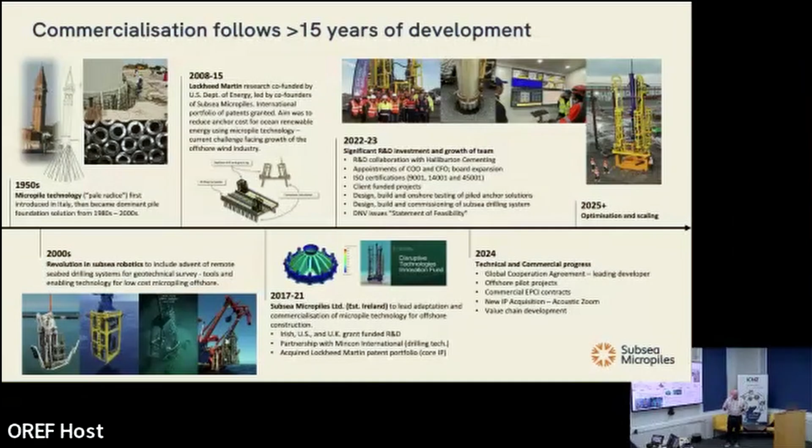Just to give everybody a little bit of context around the background, micropiles started off in the 50s in Italy. Fernando Lizzi, an Italian engineer, was tasked with trying to save old monuments in post-war Italy where there was no money and very tight space in built-up areas. So the traditional ways of stabilizing the soil beneath these monuments just weren't an option. And he looked at the root structures of trees for inspiration, and eventually did this, where he replicated it. And as it grew over the next 20, 30 years, it became the dominant foundation onshore. And what Subsea Micropiles are doing is adapting that same very proven technology and applying it to offshore subsea.

It started in 2008. Our CEO and founder, Derek Robertson, was working with Lockheed Martin. They were putting a huge amount of money into renewables at the time. They wanted to build these energy conversion units that were like big oil rigs. And they were in deep water offshore Hawaii, where there's volcanic seabed. So deep water, very hard seabed, really difficult to anchor anything in.

And John Machin, who is a renowned geotechnical engineer that I worked with at Acteon, got together with Derek and said, well, why don't we use a cluster of micropiles, the same as they do onshore in civil construction, and just install them instead? And of course, the first question is, how on earth are we going to do that at 2,000 meters water depth? But at the same time, there was this whole revolution happening in subsea robotics, where the tools needed to do it were actually already coming to the market. They were being used for geotechnical drilling and soil sampling.

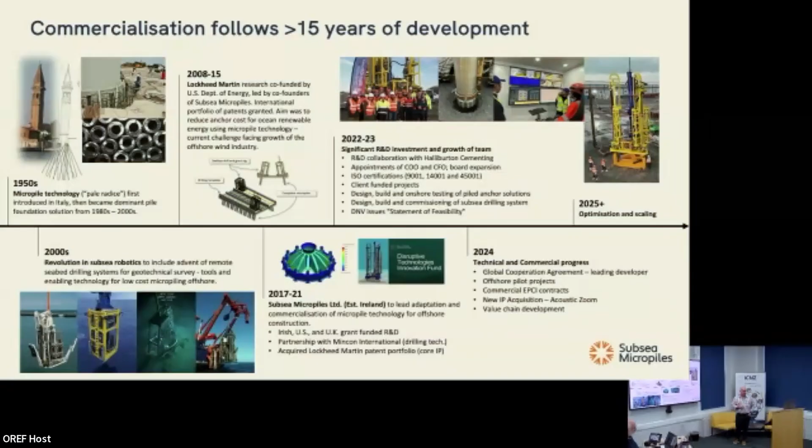Oh, you've got something exciting to do. We can definitely help you. And so we decided to do our prototype test here. Then Orkney Harbour actually got on board very quickly and said they need an anchor. So we combined the two, and it helps us get to technology readiness level 8 if we install a commercial anchor. So we agreed commercial terms with Orkney Harbour. So when we installed it, we sold it to them, which helps us, helps them. And now they've got a working anchor in Scapa Flow that they can use.

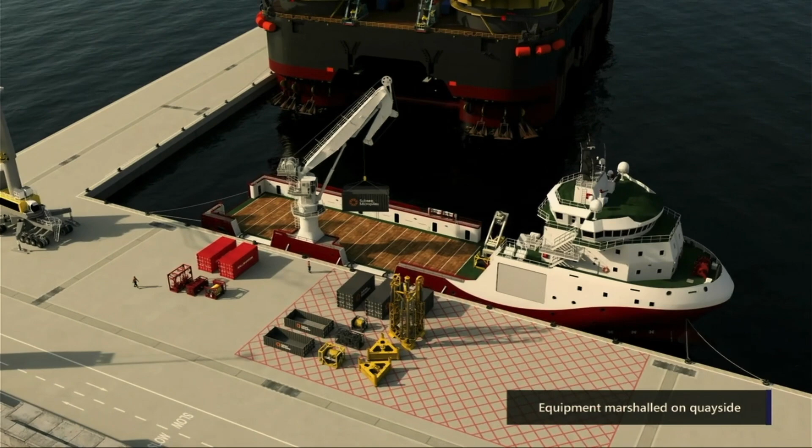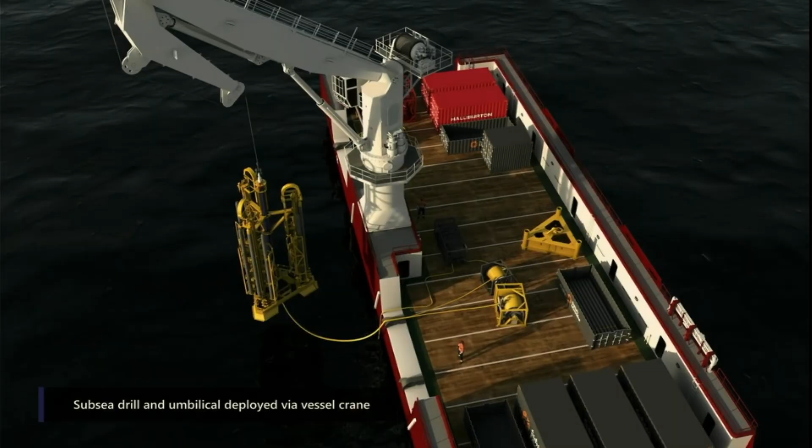And now we've finished the project. We are now looking at optimizing designs and starting to scale up a bit and look at the next things down the road. I've got an animation next that just gives you a cartoon of how it works, how it all goes together. This was the anchor that we installed in Scapa. About 8.5 tons, triangular steel anchor with a pile sleeve on each corner. So we put it on the seabed and then lower our drill down on top of it, which is the same shape.

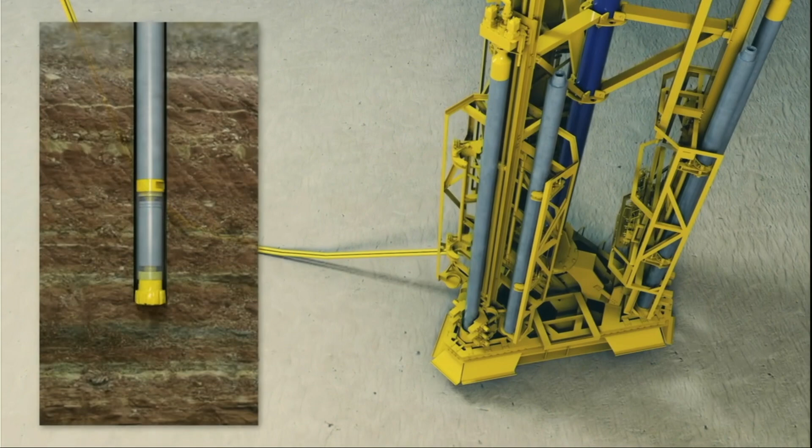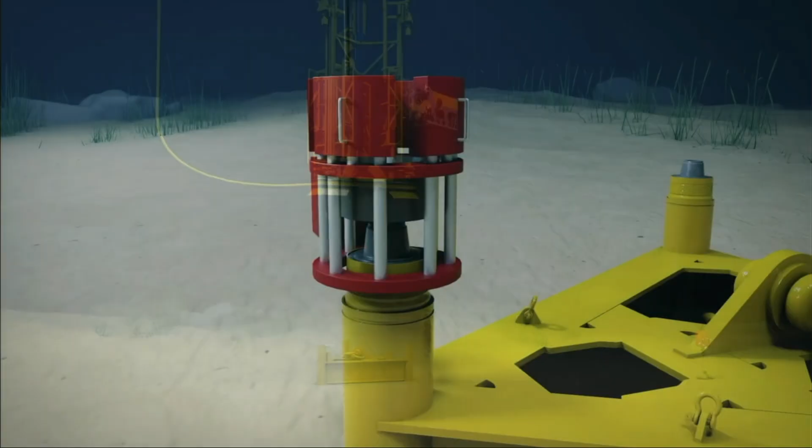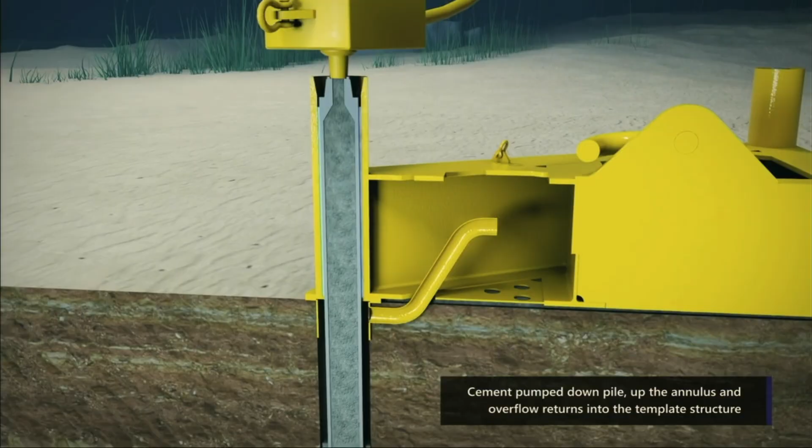We use a percussive hammer drill because we want to take advantage of really quick drilling penetration through rock. And what that means is we pump high pressure seawater down the middle of the pile, which fires the percussive hammer, which allows us to drill and make good progress. Then we flush the annulus with the same seawater. We make the connections on the seabed with the clamp system on the drill. So we work in 6-meter pile lengths. In Scapa, we installed 18 meters, so three 6-meter piles in each corner. And the intended end use is the floating wind farm, or the floating wind foundations.

So it's interesting the journey that we've been on, because the percussive hammers have never been used subsea. They're very well used onshore. Every mine around the world uses percussive hammers to make progress through rock. We have a very good partner in Ireland called Mincon, who is a drilling technology company, and they've supported us all the way through this. And they've designed and built percussive hammers to work with water rather than air, which they use onshore because air is readily available, and these mines tend to be in isolated areas where water's rare.

So we went through a whole build and test campaign for about 2 years with the hammer, with two objectives. One was get it to do what we want it to do, but every iteration of design was to get cost out as well, because these are consumable items for us. So it sounds a bit crazy that we'll drill a hole with an expensive drill and we'll leave it all in the hole and grout it and cement it in.

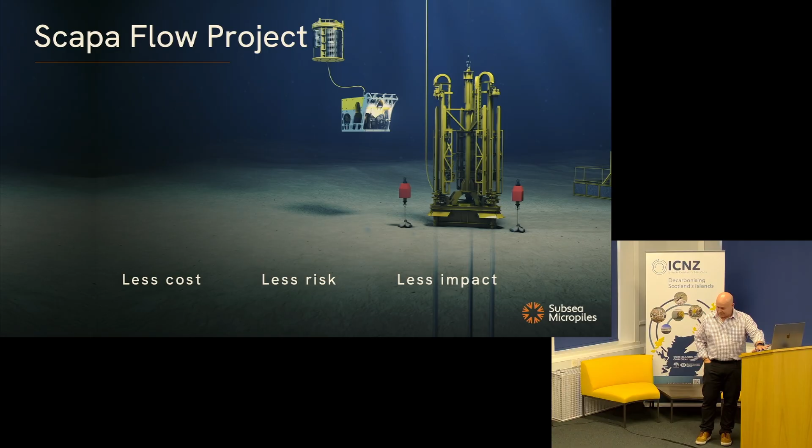No, that's fine. Carry on, sorry. Okay, no worries. No, I mean, everybody's welcome. I'll just let this play. I think I have to press it twice.

This is a video. You might have seen it on LinkedIn, but we made this at the end of the project. Taken our whole drill system to Orkney and mobilised it in the yard.

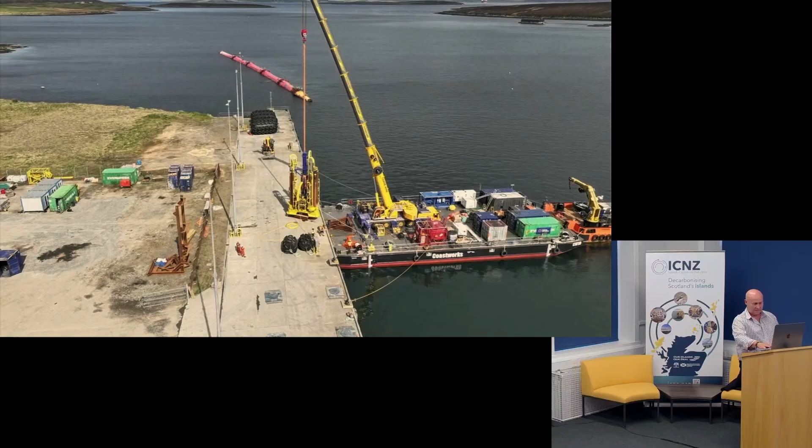Can everybody hear that? It's just playing through your laptop. You can see behind us now. It's ready to go subsea and to drill in the piles. I don't have a clue how to do that. That's the only bit of talking anyway.

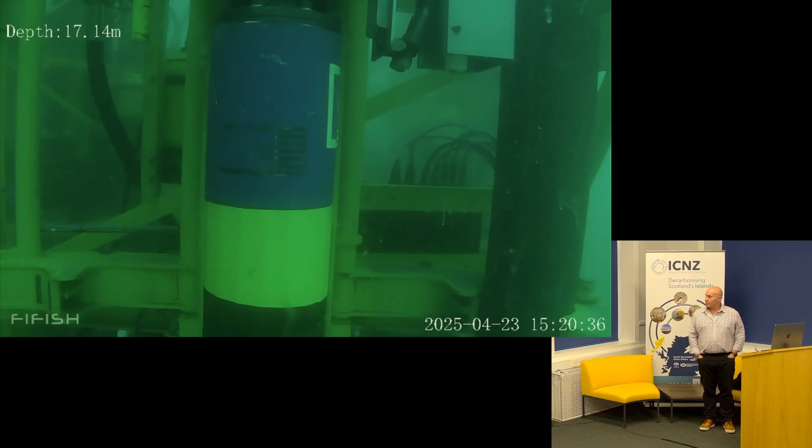We tried to get lots of the landscape in as well. So I think with all the work that went into planning this, a lot of time with Alex and Leask Marine and Gareth, we were actually only drilling for one afternoon. So we installed all 3 piles for the first time ever, subsea, in one session in the afternoon. They took much longer than when we were doing them on shore, when everybody could see everything and touch it.

So we were very careful, very slow, deliberate steps. Figured nobody was going to thank us for dropping a pile on the seabed. So I think it took us something like 2 3/4 hours in the first one, about an hour and 45 minutes in the second one, and quicker in the third one as everybody got more confident, more comfortable with it all.

There were a few very basic objectives for the project. We wanted to demonstrate as a company to the industry that we were capable of a full execution in an offshore environment, subsea, which was a big step for our company. Like I said, we started 3.5 years ago, I was number 2 employee. We did this project in April, and I think we've grown by 5 more since then, so we're up to about 22 people now. We wanted to reach TRL 8 with a commercially installed anchor.

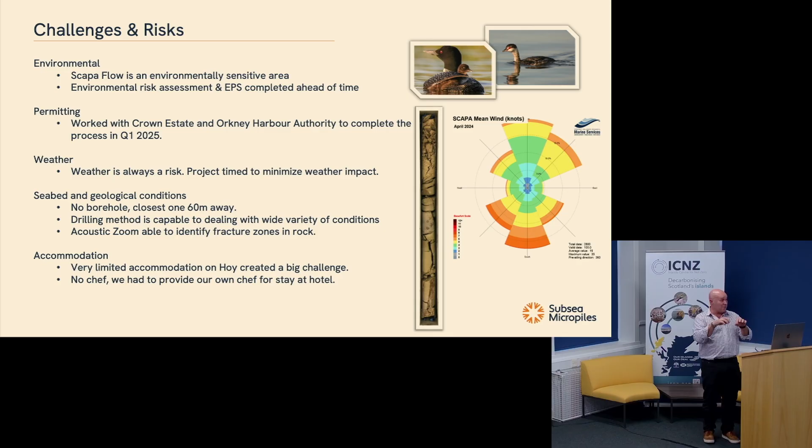So we got there, and then it turned out there was no chef, so we had to provide a chef as well. Luckily, my brother is a chef offshore, so he had a network of chefs that we were sending up on time off for a few months. So the guys actually got very well spoiled in the end, but they were this close to living off Co-op meal deals. So as always, any project has various risks and challenges, and you work through them, and we had a lot of help along the way.

What we did with the survey really astonished us. So we installed something called hydrophone streamers on the seabed. We did that about a week before. Leask had a vessel available, so we went and put them all down the week before and put the anchor template down at the same time. We put them in a pattern of 2 chevrons with a circle around the anchor.

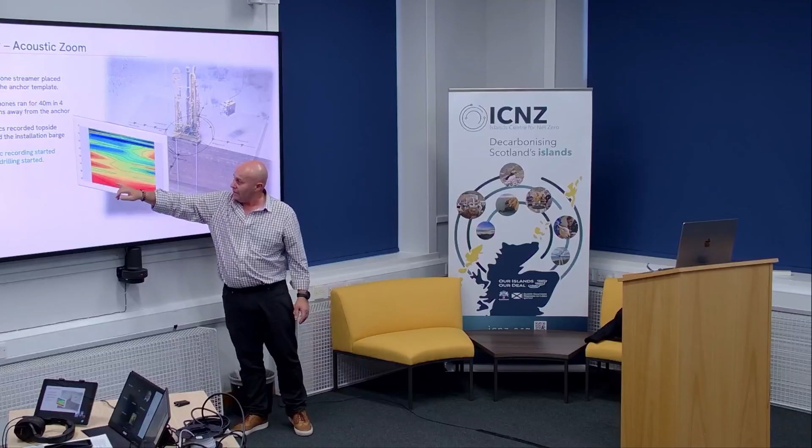And we had a hardwired laptop on the barge when we were drilling during all the operations to record and log all the data that was recorded. This might look a bit like a tie-dye T-shirt to everybody, like it did to me. But what we're seeing here in these red areas is fractures in the rock, about 13 metres down from the seabed.

And the most amazing part was our chief scientific officer in the company, Jacques Guigné. He lives in Canada. And I was standing on the cliffs because there was no room on the barge for me, talking to the project manager, James, who you saw in the video. And Jacques called me from Canada and said, "Are you drilling yet, Mark?" I'm like, "No, they've just test fired each of the hammers."

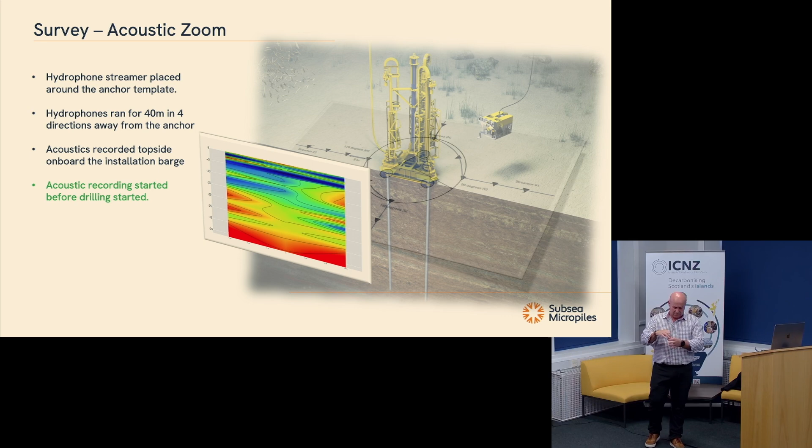So at this point, the hammer is touching the sand, but it's not penetrating. It's just enough to resist so that we can put some water pressure through and test fire it. And Jacques said from the test firing, this is what he could see. So he could see fractures in the seabed 13 meters down before we'd even started drilling. And he's like, I'm looking at the raw data coming in and there's fractures.

And I said, okay, great. You know, we'll drill through them. And he said, how much grout have you got? And I thought, oh, that's a point. So it gave me some time to think about it. It didn't cause us any problems drilling. So we went ahead, drilled all the holes that afternoon and started thinking about how we're going to grout, because it's obvious if there's cavities and fractures in the rock, we have a high risk of losing grout into the formation.

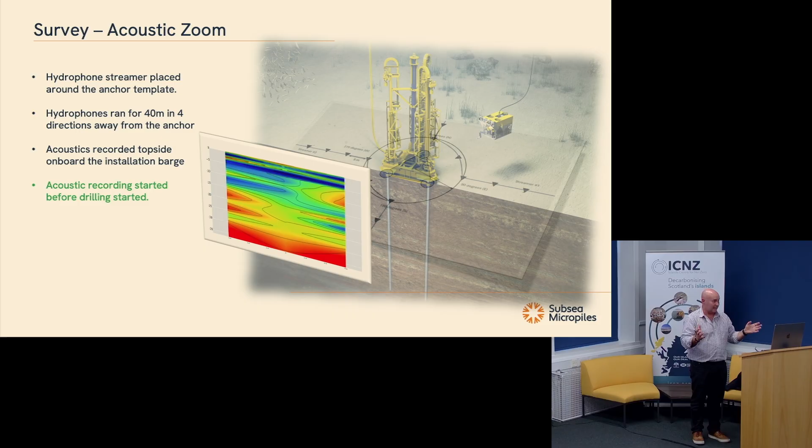So we had a thought about doing that and decided we'll probably have to do it in 2 sessions rather than one single session, because if we start losing grout, we only had 10 tons of grout. We planned to use 6, and I think we pumped 5 down and we weren't filling anything up, and we thought, right, let's stop there, let it set and cure, and then we'll top up, which is what we did. We grouted the first lot the next morning after we drilled, and then we stopped after about 2 hours, and then we came back a week later and finished it off, topped it off.

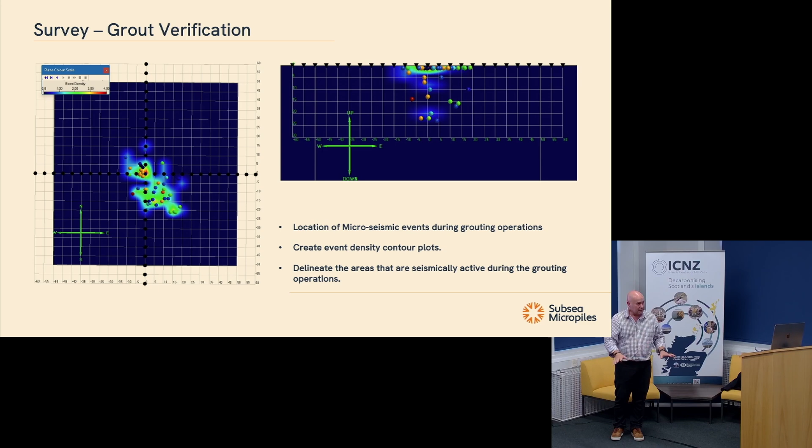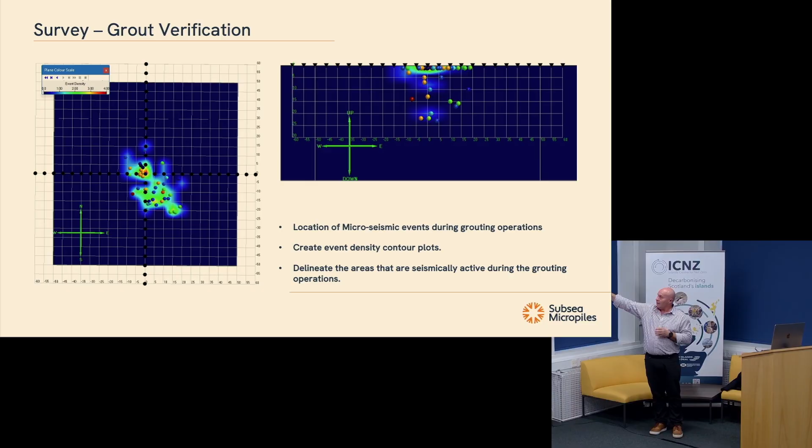The other thing that was amazing about this technology was when we were grouting, we're pumping a heavy but very, very viscous liquid down the hose, not at high pressure, but the noise of it travelling through the hose and down the pile and into the seabed, into the rock structures, was enough for our hydrophones to pick up microseismic events in the seabed, which allowed us to track where the grout went. And so all these points are where the microseismic events happened. So we now know that when we were losing grout, where it was going. And it led us to develop a 3D cloud image of exactly where the grout was.

And so we were really happy with this. This is a huge step forward in a much quicker time than we had thought was possible. It shows us here that we're losing grout into some sort of cavity down here. You would expect to see a lot in the shallow part, but it verified for us where it went. And this has quite big implications in the industry, because generally people don't know.

You know, you pump grout down and you wait for it to return, and you now know that you've got a full circular return, and you pre-agree how much you're going to return. DNV have some stipulations about that, how much overage. You calculate how much you've pumped, and that's it. You don't know if you've lost any. You don't know if it's gone into any fractures normally. So this is really a really big deal for us, and we're continuing to finely tune. I say we. Jacques Guigné is the guy behind this. He's continually fine-tuning this.

Is it in feet rather than metres? I have no idea. Well, you said you were only putting 18 metre piles in, and it's over 25 down is the bottom of the grout picture. Well, that's right, because we were losing it into the fractures, and we didn't know whether those went up, sideways, or down. Well, that's what I was trying to work out. Has it gone down below? So it looks like it's gone down here.

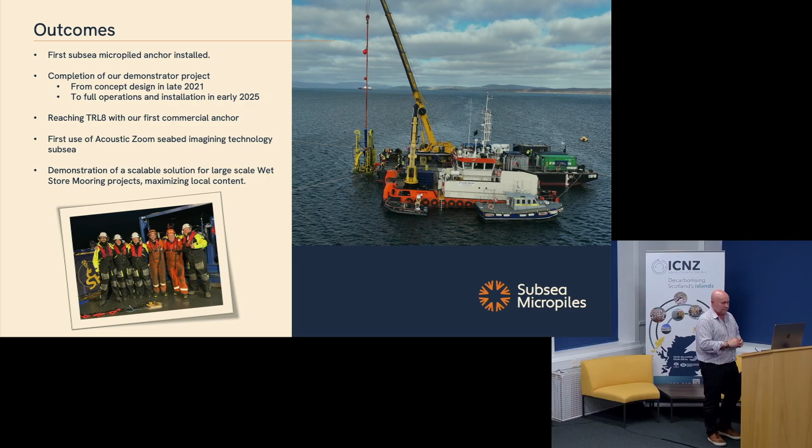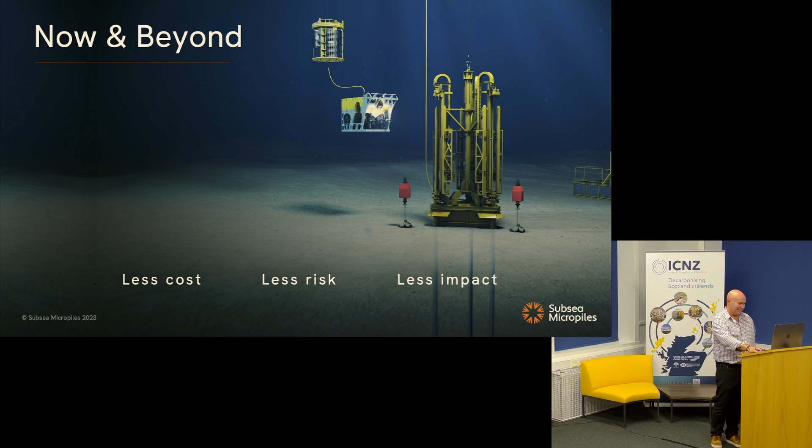So next for us, everything gets bigger. We've got some pretty significant industry partners supporting us. Mincon, you saw their hammer drill in the water, their percussive hammer. They are a global publicly traded company based in Shannon in Ireland. Fantastic to work with. And they've supported us all the way through and will continue to do so.

Halliburton has worked with us for 4 years very closely, and they're our grouting partner. We have a global supply agreement in place with them, as we do with Mincon. And Marubeni Itochu Steel is one of our investors, and we have a global supply agreement in place with them for steel.

So when we think about what risks we sit squarely on as a business, there's lots of companies that can put something on the seabed. When it comes to high volume putting things on the seabed, the main risks we identified early was access to steel when we needed it, access to cement or grout when we needed it, and access to drilling equipment when we needed it. And we've put a lot of work in over the last 3 years to get these relationships in place with some companies that are big enough, you could argue, shouldn't really even be talking to us, but for some reason they really like the journey.

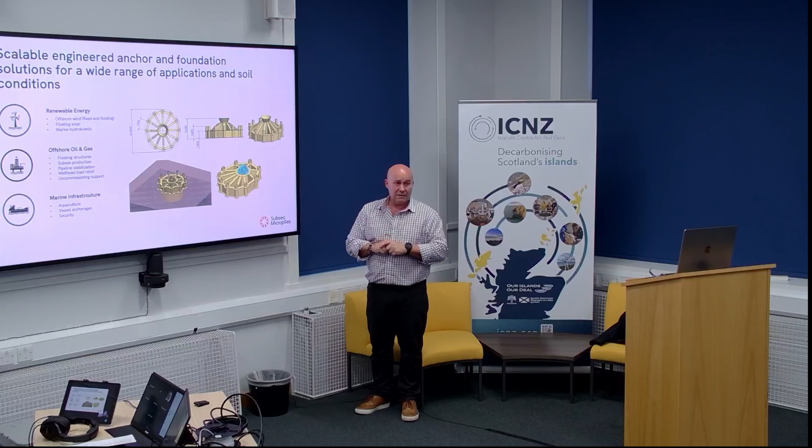We touched on it earlier about what the next anchors look like, what the bigger capacity anchors look like. These are just some examples of stuff we've designed over the last year or two. This is a 12-pile template for a TLP, a tension leg platform, so almost all vertical load. This is designed for a 2,000-ton vertical load. These are 1,000-ton, almost horizontal, but with some vertical elements to it, for floating wind, and this is the same. This one was our first go at it for a project in France, and it evolved into this.

So that's where we're going most of the time now when we're contacted by potential customers. It's for much higher capacities than the one we installed, but it's very scalable. So we're quite happy to have those discussions. And these are the sectors that we work across with all the dialogue that we have.

We think aquaculture will be quite interesting. When aquaculture goes into deeper water, which they're all trying to now, I think they're going to find that it's a very uncomfortable place compared to the sheltered areas that aquaculture is used to. And, you know, designing for storm conditions, designing for 100-year storms is a very different thing than designing for something that's in a sheltered location. So we think we can help with that and reduce how many anchors they need.

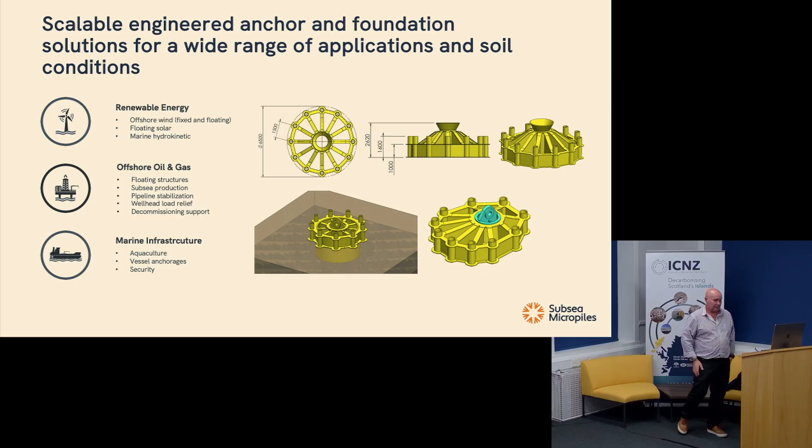We touched on it on the opening slide. We have a working concept for how to industrialize the installation process, where we work with a crane vessel at the front and 3 PSVs behind it. Micropiles are good in a number of ways, but one of them is that it lends itself really well to doing lots of activities in parallel, because we do lots of small things instead of one big thing. So if you look at a suction pile or a driven pile solution, you have a big vessel at the front and it's doing everything because it's one big lift and then one big drill or one big hammer.

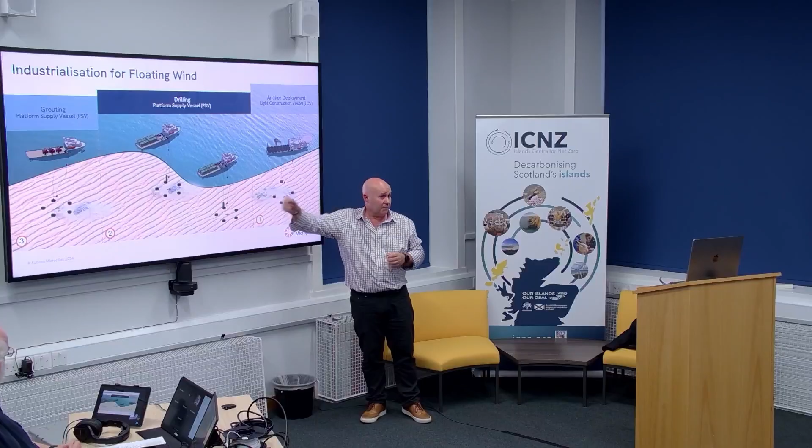For us, this big vessel at the front's only a 150-ton crane. And all it does is put templates in the seabed in the right place. And then we have 2 vessels drilling all the time. And then the last one would be the Halliburton vessel that just grouts and surveys. So we have the as-built survey done as it finishes grouting. So we think that, you know, the average installation time for some of these big drilled and grouted piles can be multiple days for each pile. We think that we can install an equivalent capacity anchor in the same hard seabeds at about 4 times that speed with a smaller day rate.

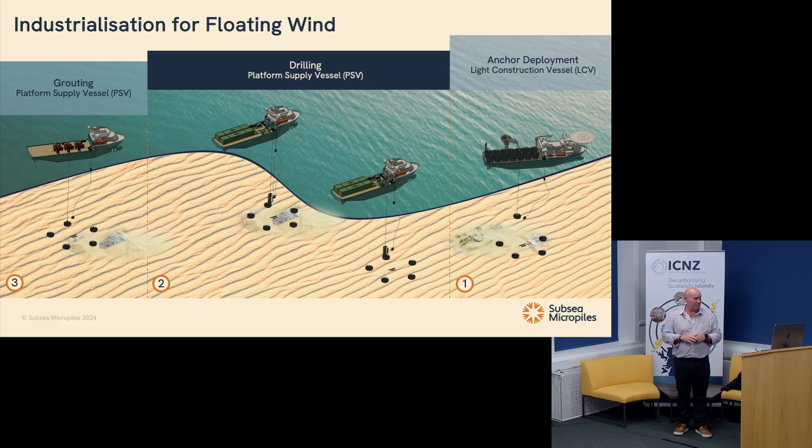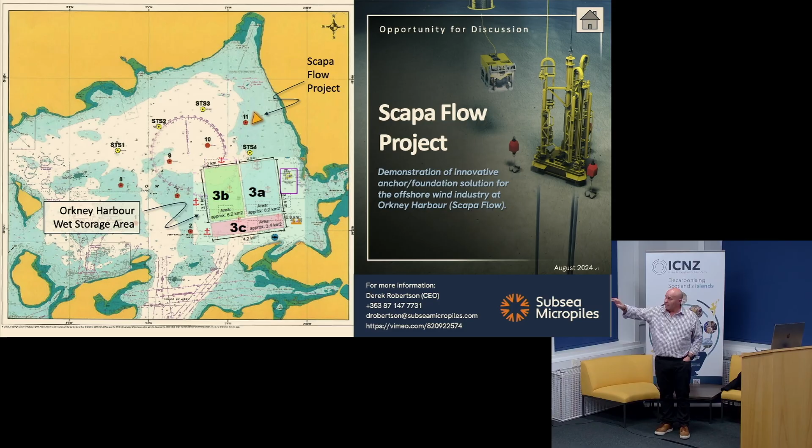And lastly, we are still in dialogue with Orkney Harbour about what, if anything, they want to do next. They have some ambitions to support floating wind and fixed wind in Scapa. There's a lot of sense in it, and that, along with, you know, Kishorn, Cromarty, Bristol Port, in Moray there is an area where a private company leased an area from Crown Estate to put wet store moorings in as a standalone business outside of ports. So we're in dialogue with all of them, but I'm only really highlighting Orkney here. This is where they're planning to put their wet store at the moment.

And that is it. Thank you.

I've got two questions. Yes. In the museum they have a very good screen. You can actually scroll over the wrecks in Scapa Flow in 3D. What would make your presentation amazing is the same sort of thing with all that data points. You get your mouse and just say, let's look at this route in all 3 dimensions. To me, that would be amazing, just seeing that.

I agree. And the second thing was, you mentioned that it's quite hard for the guy actually drilling the holes to do 1, let alone 3. If you can capture all this sensor data from all the stuff you're doing, feed that into an AI, it would make their life much easier. Agreed. But I'm sure you're doing that. Yeah, so what we rely on heavily at the moment is a master driller who understands what everything feels like. And we agree, we have to work our way through that, and beyond that, our next drill will have many more sensors.

And we're actually working through all the data logs from the data we collected now to figure out how do we improve it and how do we feed that into the next hole that we drill. That would be a good university project. Yeah, I agree. We've got an intern from the University of Strathclyde just now doing that.